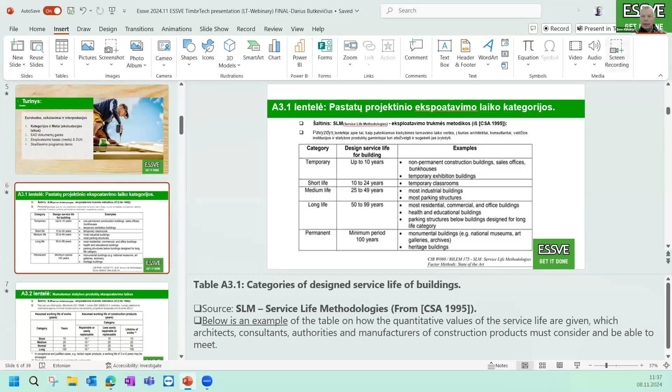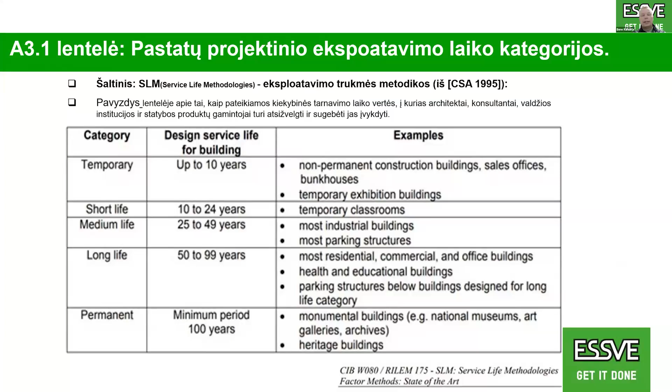Is it lasting up to 10, 25, 50, or more than 100 years? The same way we should find the fasteners. When the project goes to engineer's hands, the engineer follows the type so they will select, and often in a project description it's written it's worth for 50 years. My recommendation is to follow norms, because norms guide that structural connections are for 50 years, less easily replaceable ones are 25 years, and easily replaceable ones are 10 years. It's important when we go to the documentation and select the right products for the right applications.

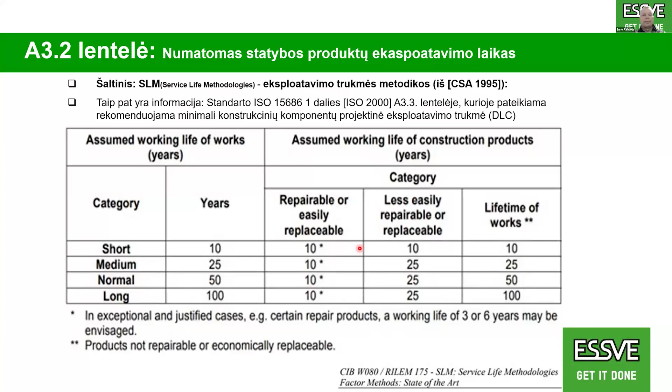Now, from a fastening point of view, when we do the ETAs for our facade products, roof products, structural products, or metal fasteners, it's specified the similar way. To make your product or project competitive, use the norm, and then you have more flexibility to be in a 10, 25, or 50 year life cycle with a certain application area.

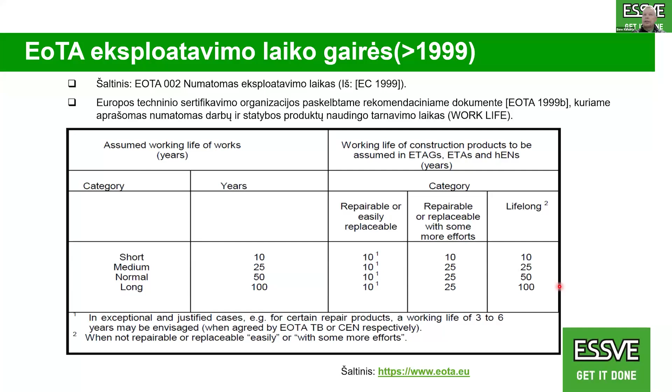Why is it important? Because when selecting fasteners for applications with metal, wood, and brackets, we have Eurocode 5, which covers, for example, service classes. If we do a wood application with harmonized products, it's easy to find straight fixing, but angle fixing is available too, though it takes the engineer more time to calculate. If you go to ETA documents, you will quickly find the right values, right products, and a good solution for the engineering calculation.

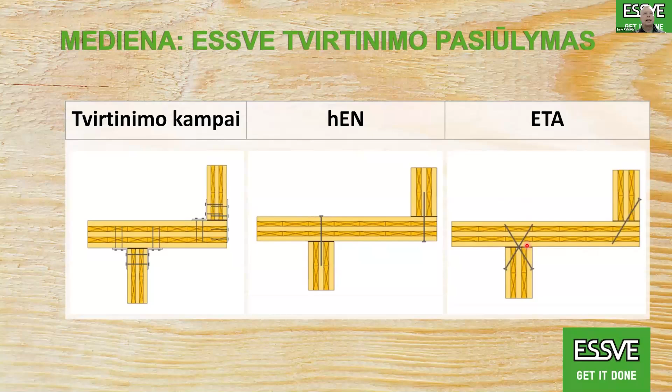Now we are in the ETA area, and if we go to the ETA documentation, we will find what applications we're able to use the product in. As you have the presentation also at the end, I'm not going to dwell on the details, but all applications are described nicely there.

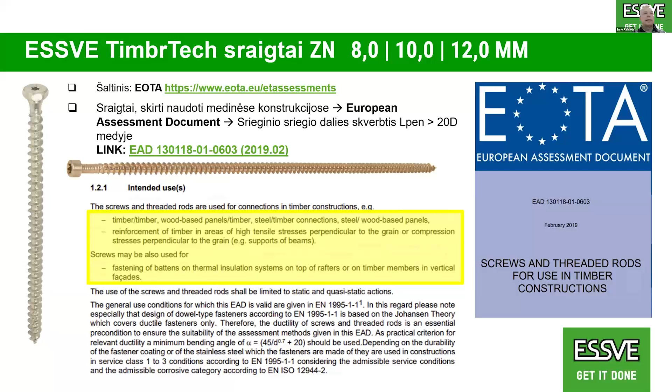Moving forward, it's also written when we should use stainless steel, and what the material of the stainless steel really is. And if we go even further in wood applications...

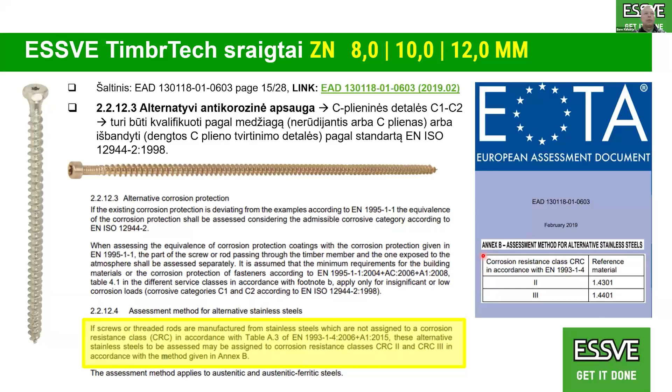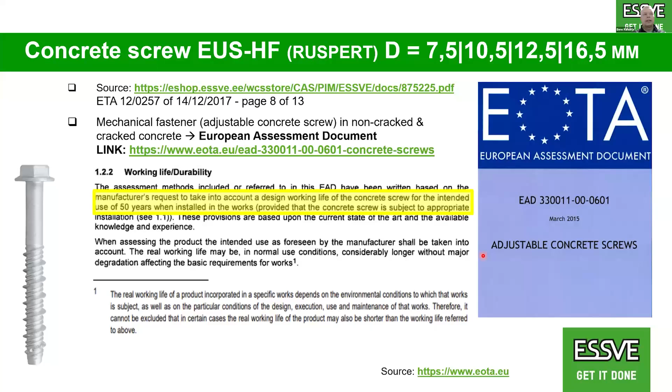Then we also have concrete fixings there. Similarly, we find that the working life of concrete fixing is similar to wood fixings, at 50 years. So that's good to know. They are all structural connections in the 50-year application area.

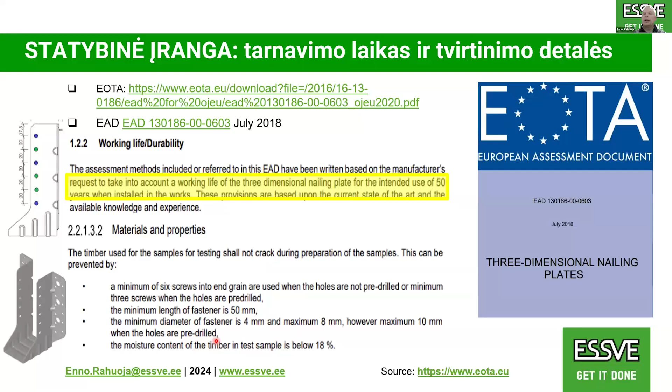If we go to bracket areas, structural connections, there too we have important points to recognize - the same 50 years is mentioned. But there's also a mention that you need to pay attention when you pre-drill the fastener holes and when you don't - what the right fastener length is for structural applications and which holes you're filling. If you want to do 3-point fixings in timber ends, you should know there must also be pre-drilled holes, which is often never done, but it's important to specify it.

Now, when we go to facade businesses, we see that stainless steel is often asked for in external applications. But when we do timber framing buildings and put a sandwich panel on top, it's important to turn all the fastenings to internal applications. How to do that - contact us and we support you.

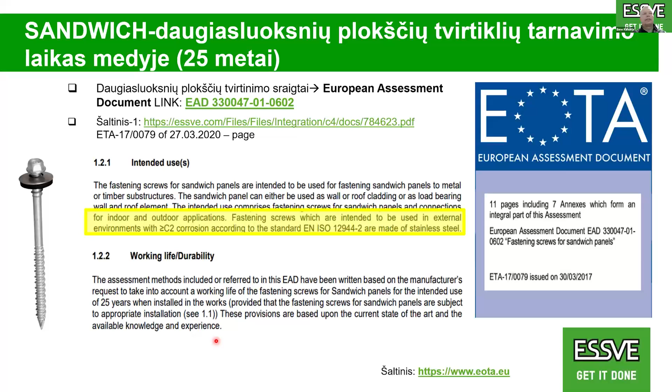We also see that all facade systems have a working life of 25 years. And if you go further into roofing areas, for example flat roof, the fasteners are specified for 10 years. Now it's very important that we don't mix up those years. Why? Because often the 10-year fasteners are used in a 50-year area, or the 25-year fastener is used in a 50-year area, or the selection of fasteners isn't done well or correctly.

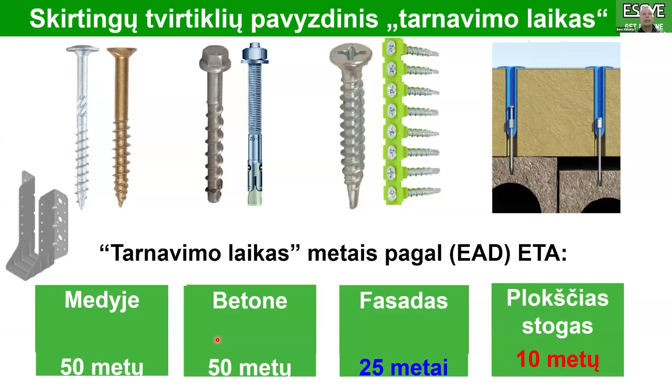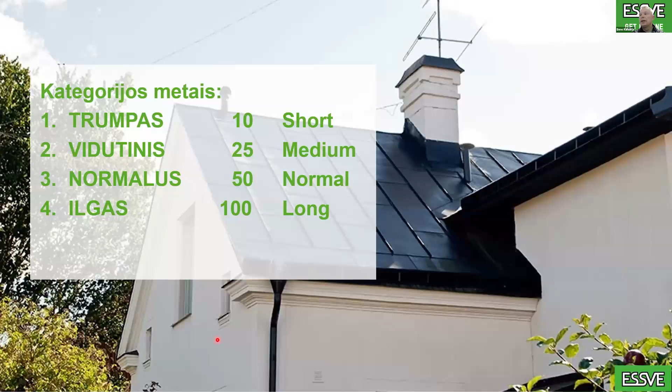My idea to present is that if you, as an engineer or architect, specify the fasteners normally, you're looking forward for 50 years, and you know that in replaceable or easy replaceable areas it's 10 or 25 year exceptions as well.

So if we go now on service classes and think about what is described there, we see that many things are specified according to the humidity in the wood. The humidity in the wood determines this: below 12%, or above 12%, or above 20% which is already service class 3.

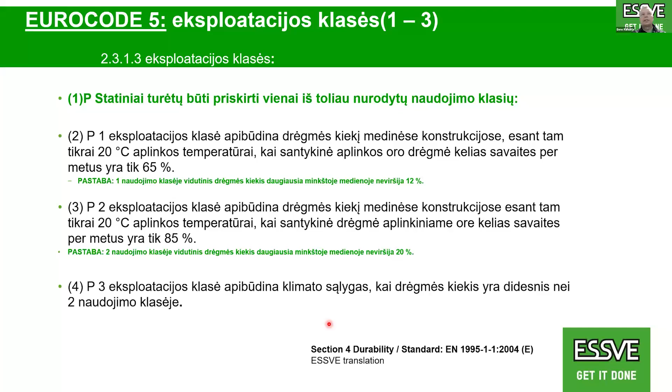That makes the service classes 1, 2, 3 simplify finding the right product coating in table 4.1, which is a durability point in Eurocode 5. We see that on diameter 4 or bigger, we don't need any coatings because often the wood protects against external environment.

But new legislation or new standards are guiding us to also pay attention to environmental conditions. But when selecting the right fastener, I pay attention that the table specifies that if a fastener is specified, then the bracket or metal sheet coating comes next.

Or when we follow the 25 micron surface thickness, then the bracket or metal sheet should be a Z350 coating thickness. Of course, when we have risky areas, we should think about when to use stainless steel.

What we see here is that in a 50 year context, when we are in a metal-wood application, meaning bracket fixing, then often for outside areas to last 50 years, we need to use fully stainless steel. So engineers often think about how to turn it to be on service class 2 level.

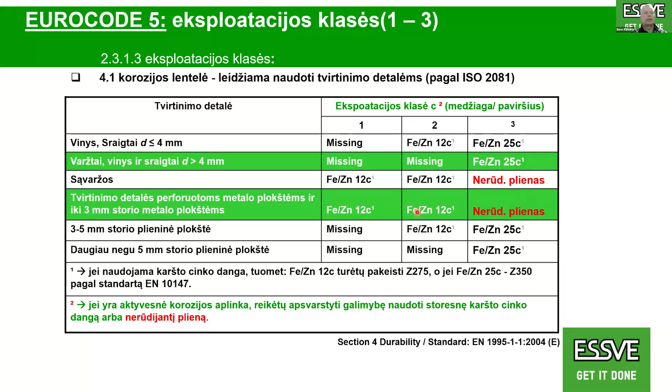If we jump into Eurocode 3, which is a metal standard, then we see there is a lot of info which supports you to select the right fastener in the right area. It's also divided for exterior and interior area.

As we see in a facade area, all the exterior metal fasteners in metal application should be stainless steel, then all fasteners which are inside of the wind barrier area are actually kind of outside, but they are inside of the construction, which is the interior area.

And we are able to go and think about it now: is it also replaceable or easy replaceable, and reduce down the working life of the fastener selection? But for more details, when you have questions, we are coming easily to support you.

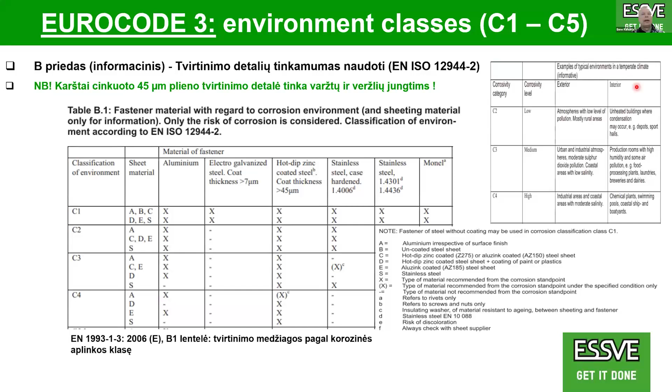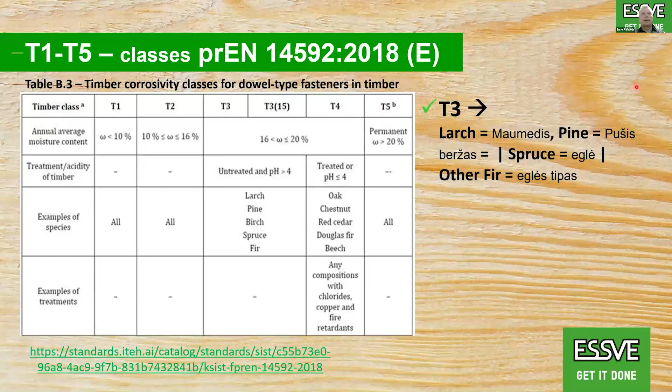Talking about new EN standards: the new EN standards in the wood area also talk about timber classes, paying attention to timber class 3 and timber class 4. These are the areas where, when the timber humidity gets higher than 16%, the timber itself starts being aggressive and turns the fasteners towards corrosion.

So we should think about how we can manage the 50 years in areas where it's needed, or where we can manage the 25 years, and think about whether the timber humidity area is now service class 2 or service class 3. Service class 3 is above 20%.

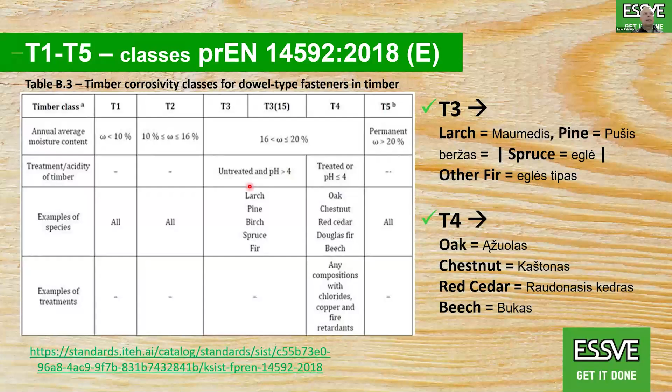But also the timber classes settle the zinc plate thicknesses of the fasteners. If you think about the zinc plate thicknesses of the fasteners in carbon steel range, it also settles the stainless steel materials.

And here is, matter of fact, the pH level in wood. We saw in the previous pictures where the wood was mentioned, which is the timber 3 or timber 4 area.

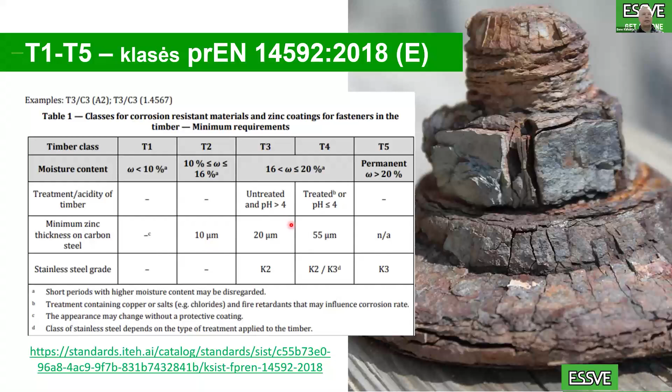Now, if we look at also the new standards where we're heading, then we see that the very dominant area is C2, which can be a condensated area in the wall, outside or interior side, now marked also with not weathered or weathered area.

And that's very important, that we mark a lot of areas as not weathered, where we can have more economical fasteners used and selected.

I also pay attention here to a nice remark: real C3 and C4 atmosphere in Europe is very rare and only found where industrial areas meet coast areas, or also near splash zone roads treated with de-icing salt. For example, we are in Kaunas, we are far away from the coastal line, but we salt our streets in winter time, where the humidity will blow with rain from the car tires to the facades, and we have salt there, and we call that a C3 area, for example.

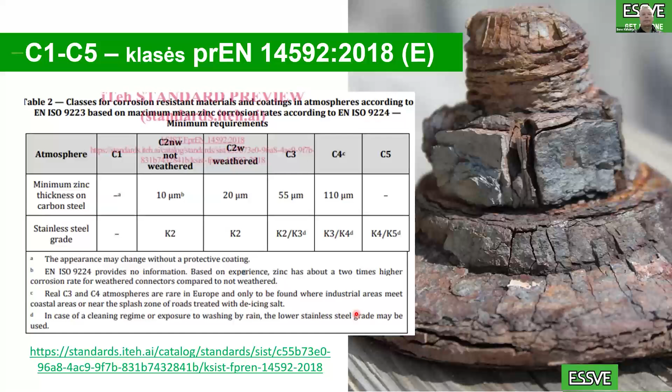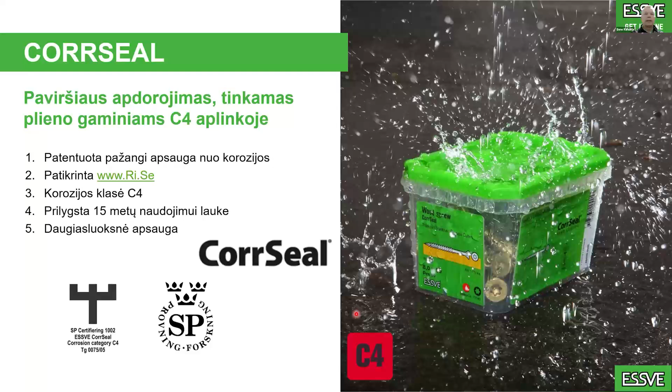We have quite a range of ESSVE CorrSeal products which meet and fulfill the C4 carbon steel product applications. Pay attention, in a 15-year area you can downgrade them to the C3 25-year area to fulfill replaceable or easy replaceable applications, what you're looking for in C3 or C2 applications.

Then what else can we talk about here? We talk about needed values, what we need to do. And as engineers always ask, also in renovation businesses or new businesses, some pull-out service. This is all what we offer.

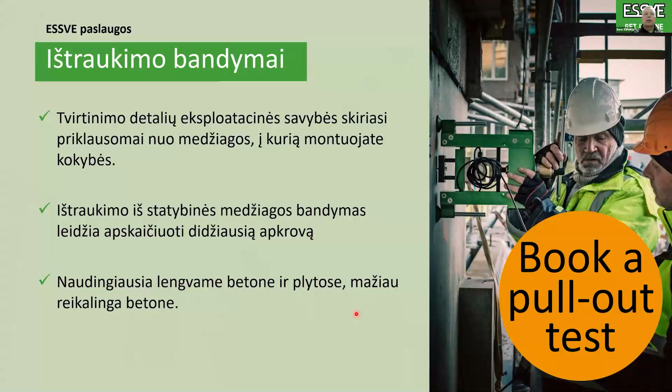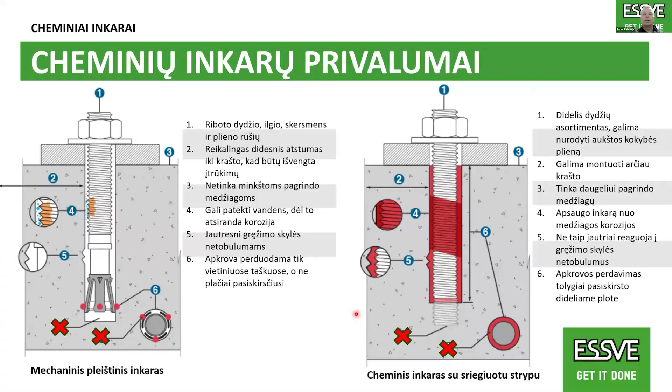But pull-out, often we do it in concrete, how to fix timber really on concrete application. And the calculation program we mentioned, but important to know that the chemical and mechanical anchors are in our full range assortment and strongly supported with ESSVE calculation program.

If we go to our timber deck product range, we do have here as well the calculation program. And maybe now, for those who already Googled and found out that ESSVE really has a wood calculation program, we could make some quick calculations in there.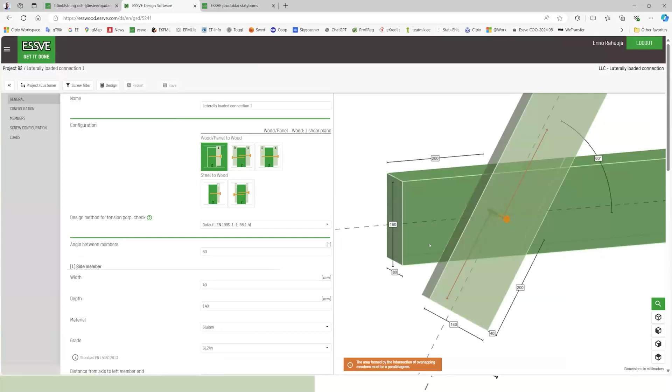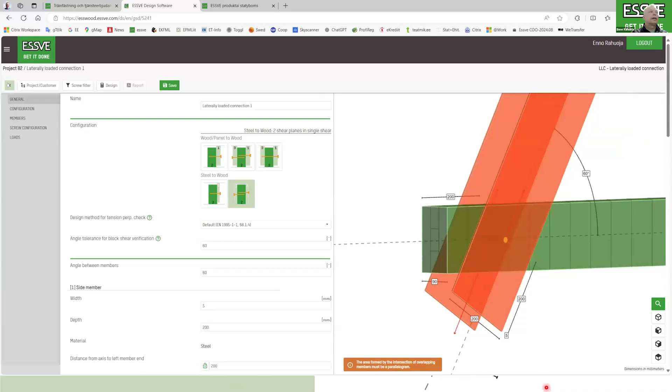I'll show you two applications. One application - ESSVE is one of the first to show that we have also a LLC application. So we can do here many of the calculation ways, and we can do it which way we want. We can do it with one fastener. We can bring also the metal elements in it. That's one sample.

Other sample, which I'll bring in here - I will not save that - is axial loaded connections. And when we often do such a fixing with metal brackets, in metal brackets we are not able to do such angle fixings. And those angle fixings come with the screw applications very quick.

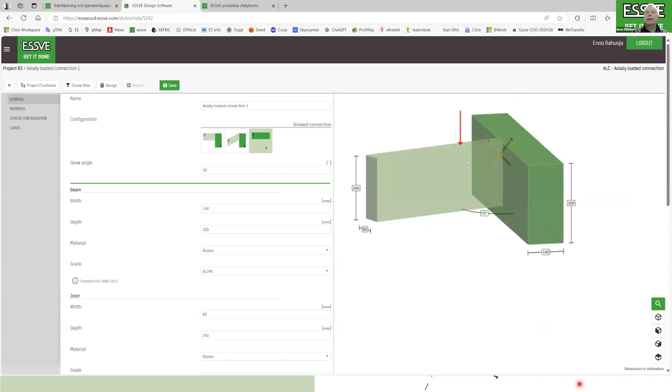For example, quick sample, difficult, is when our wood is at 45 degrees and we do here a cross fixing, for example. Then in a cross fixing, we need to do not cross fixing, we need to do parallel to save time viewing, because there is no room for a 45-degree wood application.

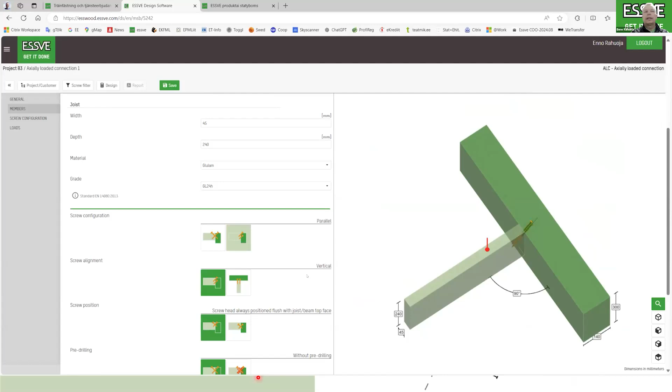And you as a designer are able to fulfill your project info, you are able to make your design calculation, and in the design calculation you have an assortment of products. If you want to filter different types of fasteners, you will get it, and when you look at the final report, you will get it very fast.

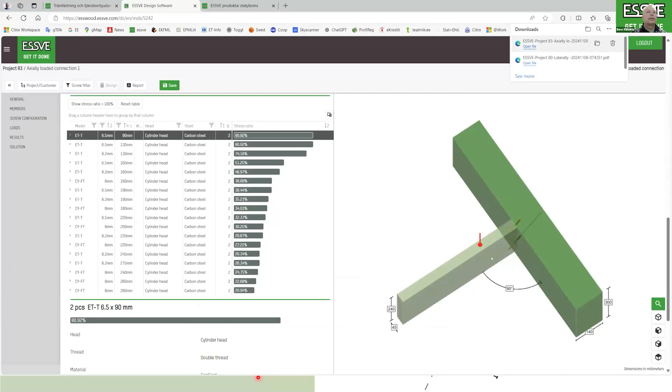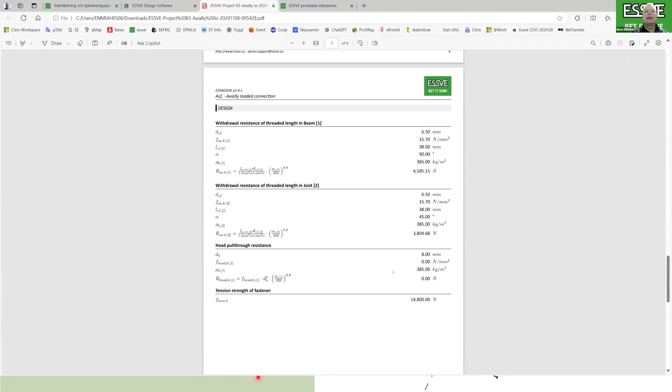Our idea is to support you and tell you, please feel free to go and use ESSVE calculation programs. You will get a nice project layout. You get guided notes on which standards they are based on. You have a worksheet for installers to see what fasteners, how and when they are installed, and it doesn't matter if you drill it up or down, it works. And you have the availability to do all your check controls with passed-through calculations.

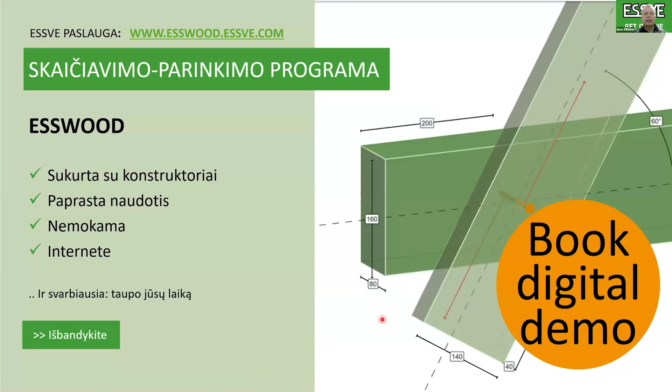So yes, that was just a fast jump into the presentation, and now to wrap up, we have it here. Finished, I thank you very much. Hopefully it was something educating, but the idea was not to go deep in, but to give you a surface overview of what we are able to support you with today in heavy timber or light timber areas. Thank you.